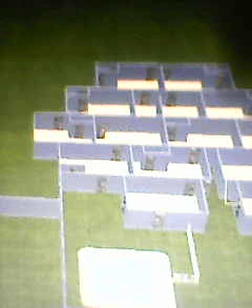All this is a block. The lines you are seeing are like the mortar in the gap of blocks. The vertical side standing erect to this side is the mortar you are seeing, which you want to say is vertical. And when you see the row, it's also the same with mortar on the block you lay - chalking, then laying, fixing, and bonding. That's where the bonding takes place.

Just look at what you're seeing. If I take any angle of this, any dimension, it will show a different dimension of the same mansion on earth. Watch carefully. So every side of it, we have 1, 2, 3, 4, 5, 6, 7, 8, 9, 10, 11, 12, 13, 14, and 15.

This is also a part of the room, so this is 15. But the main side here is 14. That makes 5, plus 1, here is 6. And look at the side of this where we are showing the path that even goes through here.

But you think it's just common to say what I did? Unless I show you what design made it - it's my own work that made all this thing work. So what I implement here is for the one who made the software to agree with what they want to use it. However, if the one who made the software didn't take you through, you can't know it. That's why they say only angels shall take you through - so we have it like that, they say.

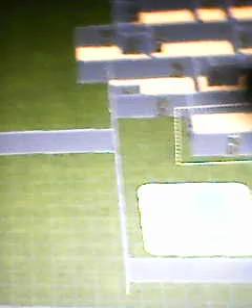At the floor level, there's 1 block room from 1 side to the other, which I counted: 1, 2, 3, 4. I told you already before you got there, and you are seeing beautifully what I'm saying. Do you understand? At the base front part here, we have 5: 1, 2, 3, 4, 5. That makes 1 part here, 1 part here, and the other half. So there are 3 things.

So let's put a roof, let's put a floor. In order to build continuous with a floor, you have to put a floor on, then build the same thing that you are seeing down there. Then we want, at this point, to roof it, with the strategy of having it as 2 story, or 1 story.

So here, at the level of the floor, we have this projection that made the divider. At this section, you are seeing the true divider of what made 3 things. What are we seeing as 3 things? Let's watch, look at the cable or the color here. You see that, right?

You see in between here, this part, there's somebody there, right? Or I haven't shown you the human being there. That's where the creation began; I started the creation right from that place. So here, you are watching that every arrow or angle, wherever it's pointing, is showing that the slope is towards that direction. Whichever angle it is, that's the angle the flow or slope of the roofing is showing. I hope you get what I'm saying.

So now you are seeing the divider of 1 here. This side half is 1, you have a block that looks like this. Then this side half also is a block that looks like this one, like a hammer or like a pencil or like an L, having a different form. Then you see the true shape, curve, and roof type that cuts itself.

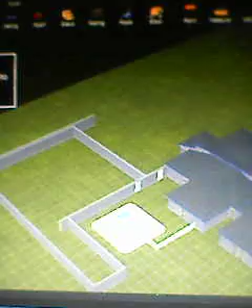There you are seeing 2 gates here, 1 here, 1 here, so 1 on 1. And you can look at where it's projecting, how do you see it? So when you are seeing it at this angle, you see that you are seeing a different dimension.

You are seeing a different dimension, and you are looking at what vision it is. When a human being were to say that everything is showing, look at the roof type. The form or shape this home or house takes, that's how you see the carved out point, which looks more like, maybe look at the details. See the projections on it. The part that is cornered, like down here, is a gutter going down. The part that is an angle like a triangle pointing, that's a part that shoots up to this side.

So until I take you around or until I show you how I build it, you can never say you know what I've done here. You see this side, look at the side here, you see the side here. So until you come to this side, you never know how this side is also like. Do you understand what I'm saying? I don't have to have anybody prove it that we have made it, and you have to learn that I made it like this, in agreement with myself.

Anybody that insults us in the name of religion or any God or Jesus, that person is a crazy person which is not a part. Of course, I don't agree with what you are saying. But what they say you agree with in the building, like a mason, like a furniture maker, like an engineer, like architecture, like a creator, like an inventor, like a manufacturer, everything, like a farmer, everything like a heavenly or the greatest, this is showing right now.

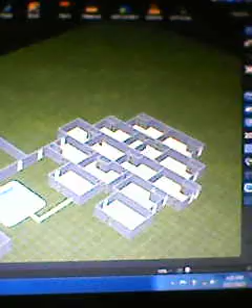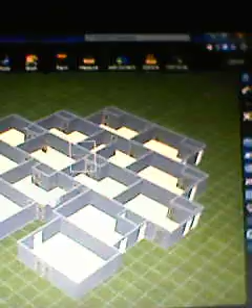I hope I'm using the time well, and that you are also learning that for you to have such things, nobody taught us what I have to do. Nobody has ever taught what I'm doing. Of course, where, which school? Heaven, until you came from heaven. Because I'm showing what we've not done before, that I just have to put a thing here, and then it is working truth. Do you understand what I've shown here now?

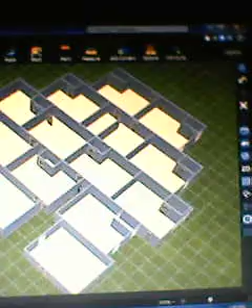Look at it well. Just look at that. Look at the angle I'm shooting it. Do you see it? You see the shape and forms that it holds? It holds it. So you'll be very powerful in understanding, because you can't do any understanding without the supernatural force of the Lord. That's why what I can do is just for me to come with the app, or they should just create the app, and I'm showing what the use of the app can do with my things that nobody has ever seen in the world.

Do you see what it is? This is the floor of the inside. Maybe you want to see what I'm saying, how it looks. You see various things that I did. So indeed, you were just supposed to have agreement to say you create along with the Lord, and that anything that comes in the name of the Lord or to this world or from light, like an application, then we are using it. Because what would bring about this very work is in the Lord's truth, the real truth, that you cannot say somebody is better than what I'm showing.

I hope you can see what I'm showing. Myself, my hand, that can block it to show that I'm the one creating it. However, when I take my hand up, you are seeing the size of the whole house.

So let me put the roof on and maybe we can show some other things. Now put it on. So it needs, when we floor it, for continuity or for roofing level, we are saying it has to look like this. If you understand the floor level, this is the level of the ground. So let's put the roof on. So the roof is on. You want to look at it? Yes, so this is the roof.

So to see every dimension of how things have been created here, wow, unless I show you the projections. So the projection at the top determines how the roof level has also been, how you cut the lintels. How we can see now the arc. Look at the curvature, like you can say you make a clay work, for the clay, or you carve a surface with this form, then that's how the rooftop is going to be. How we can see it now?

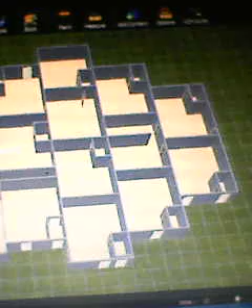Oh, let's go on internet. Let's go watch it. We'll take a break where we have put the roof on. No, let's go to the side angle. Look at it. So we are going to look at this angle.

I hope you are seeing the tilting, and not that we just work on something. So we are working in every dimension right now. I hope you can see the form, and you see the gate and the door.

I told you the window is invisible. The window is invisible, that's the healing for this home. The window is supposed to be invisible. It means that how you are seeing it, that's how the window should be. So that you won't be telling us that a home that is like this, how do you need it? Invisible. If you don't know what invisible is, I created it and I'm telling you the window should be invisible.

That's why you are not seeing the window, but there's a window. Once you see the door or the size of the door, you know the portion where the window should be. Or I'm telling you, simply, that one should be invisible.

Put the roof on small again. Let's see the dimension here. We are going to roof. We are roofing. Roof is on. Yes, what's there?

So this is the only truth revealed. How can we see that? I'm not the one who came to put my work on somebody's work. How many gates do you have? I told you every side of it is a front view.

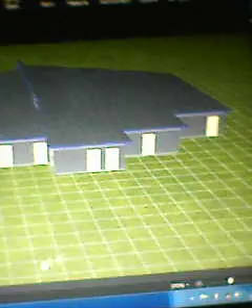Do you understand it? Yes. That I have to nail the truth. The color and things here, that's exactly what it should be. That's exactly what it is.

So I can put it in different colors. Yeah, the colors will show you, and many other colors. So what did I mention? We are going to go for what? We are going to go for something.

Just a break, let me show you something. In the darkness like this, you don't own it. But when there is light, you see what is built in the darkness. You get it? So I'm just not supposed to show what somebody is showing you.

Because we didn't go to the same school. I'm a virgin, so virgin school is different from any other person. That's the only thing I can say, that I'm using the things live, and somebody is also going about deceiving. That is somebody else doing it.

I don't think I stand anywhere to lose a battle when I'm the truth, working my truth out. Is that correct? And I told you, anybody that creates something will only ask a wise person whether what we say is correct.

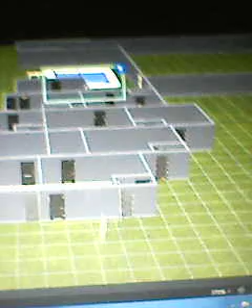So that any other thing can point out. So let's get it to the side here. Quickly. Now we have two sides shown, as it is in front. So you look at it also as if it's in the back here. The same size of what? The same size. We have all this.

So like 18 by 18x23 or 23x18. That's what makes out the whole thing that we are dividing. So that, look at this time around. This time around, we have, let's say, out of the side here. Very interesting. Very, very interesting what I want to do.

In this, you see the cut, there's a shape that runs through this. That makes what it is inside here is 6 to 9, then 23 over 8. Do you understand what it is? Like, you want to say what I'm saying, unless you understand well. Like dividing this into 3.

Let's say if we put 8, how many times would 8 go into this? But you'll be looking at the thing. The whole thing is simple, and the mansion is simple. But if you don't understand, you complicate it. It will be complication indeed for you. Like just doing the measure how I'm taking round.

Then you look at how I divide it. When you minus the main part, the remainder will be these things you are seeing. If not, you will be giving yourself difficulties, statistics, that is wrong. How I made it is what I'm showing you how we do it. Don't come and ask me what's the measure for this and that. When I do the things here, we are just simply telling you.

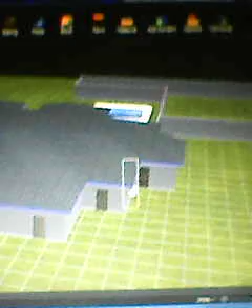As you can see the curtain and the shadow of it, how the roof really indeed looks like. Indeed, you need a form, the triangle, like you say that at this point, where you throw a straight line from this end to the end, it will be triangle throughout here. Triangle throughout, as we are seeing triangle at this corner.

So where I place the house, I build it. So I have to say, I can't just work with paper or somebody thinking you have a degree. Your degree, let it show us the house. That we can build without having what somebody thinks it takes. Then I'm showing you the very dimension.

Every tilting or rotating is giving us so much power. Look at the house, so much spirit. The home that you failed to build for us, we can build in it. Now you can stand the beauty, because it is right before you finish work. What a beauty! Technology in the light. The light is the technology, and the Lord is the technology, having everything built.

How can we see what is here? They are taking this angle 13, this angle 13, this angle 18. Why do you think 18? Because you have to see something here first. You see what I'm saying? Let's see, until you are seeing the other end.

Let's tilt to that side. There you see if there was something left out. We want to look at that thing. So if they add that part we are not seeing, you will see it as what I'm saying. Now watch carefully. You see that now is 18. Do you realize that it's 18? Why do you think it's 18?

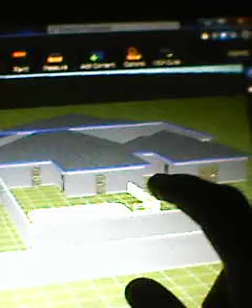However, I didn't follow any dimension before I created it, but I've finished creating it in a form, like you take the size. Maybe you understand what I'm saying? That's it, but I have to compose them. After composing them, we now know the differences. So this is the difference and the dividing.

Look at it in the arcs like this. Just watch carefully. Look at what it looks like. Look at it in the view, like the distance view. You watch that carefully. That's what it is that you want to really know.

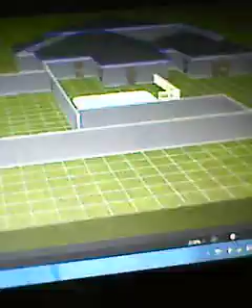So we're looking at this side here, that from the other end to this end, we're supposed to have this. From this end, let's say this corner here, to the other end, where we made it from the other way. You know, I told you there are wall overlapping.

Here it is wall overlapping. Look at the design here, you see what it is? They are wall overlapping. You understand what I'm saying? Like bypassing, or X path, or parallel. But this one has a cutting point out edge.

This one has a pointing inside, a cut off. You want to see the space in there? Let's find out, like the gap here. I just did it, watch carefully. There's a gap, you see that? That's a path that goes out.

Maybe you want to see it right, look at it, this is what I did. So it's a path that comes through, that you walk through this to the other end, and from the other end to this side. That's what I'm saying. That this side alone is 85 minus 1, like it's in there like that.

So 85 minus 1, to 1 over 4.

Yeah, that's it, like we also did it here. This side continues to be the 64, as I told you. 64 minus 3, which we have the 5 divided by 8. That means we are getting the size of it.

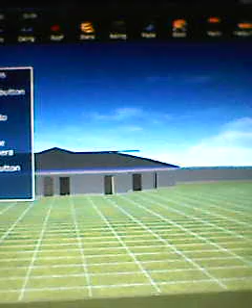Just watch carefully what I'm doing. So that's, yes, in the view of this side showing that side, yeah, so when it's like this, you see what you're going to be seeing. You will see a different side, a different form of this home.

And then you now see what? Another design. Another design, and you are seeing like also a mountain and things, really, wow. Who can have this?

And watch again. We are just leading the path to just say that's in it. So watch carefully again, if I get it to a point like this, we have changed and have to have it a very different look.

And we continue to do it. And to the side here, we have another look. Look at it, which side of this system you want to say? Even you can have one side showing in your home. In your home.

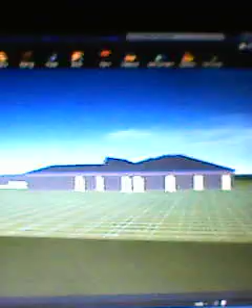In your city, who can show this, except the one who did it? They told you already, and we've gone to the system of every dimension of it. Now watch again. Look at it. You see that when we get to the side here, it's another shape, another design. Look at it.

Just watch carefully. What money can you have and say you can build this? Just watch the top here, look at what it's showing there. You see that it's projecting up, and you are seeing another thing, and you see the side, and the gate 1, 2, 3, 4, 5, 6, 7 gates here now. You see that, right? And they are all reflecting a milky color.

And just getting here, let's go there. So let's get to the pool side. That's the reserve. Because the whole thing continues to change until we finish.

Now watch carefully. So indeed, you will see like indeed the shape. Look at it, look at that. Like when you take a look at this side, you get what I'm saying? This side here, and this to the end. There we got it.

So we want to take this. I told you every side of it is a front view, because the Lord made it. And standing here, watch through. Look at that place.

So we are getting close to that. Let's take a close look. There's something I'll be showing here. So that's we go to the pool side. You get it? This is it. You can get it. And that every corner of this.

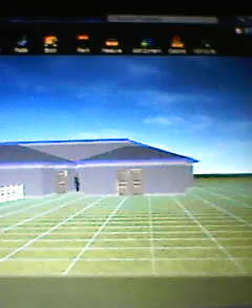So get to the side like this. So I want to look at how it will be in this very angle. Now watch again, are we not having a different design? Let's take it back a little. There we have a different design of a place.

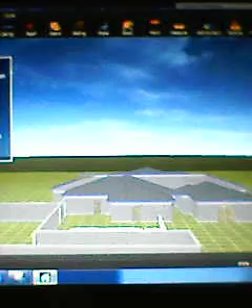I'm just trying to get to, yeah, so that's it. So it is showing that we've had every reason. So to go up, up, up, wow, what a world. And we can do this, fly over the roof of it.

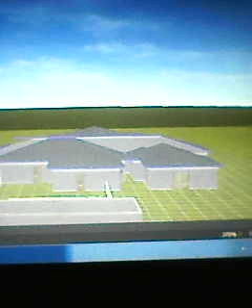So beautiful. So in the beauty, I want to do something. Let's show this part like this now. Wow. Wow.

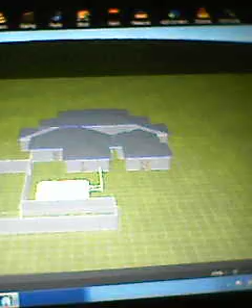So much beauty. So that's why we finish with a very sweet conversation, having more space in a place like this. And you are spoiling the whole country and say you are building. How? You are spoiling the land.